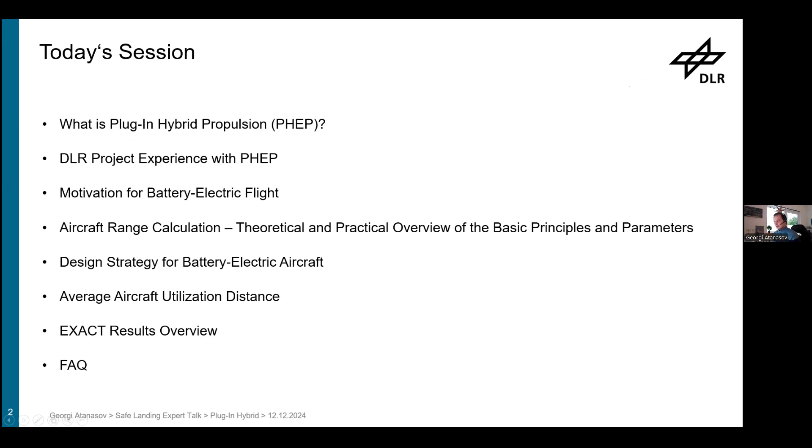I will be diving into some high level parameters on how we model aircraft, and then go into design strategy for battery electric aircraft and discuss what kind of aircraft utilization distance is used in global aviation, and what range is required for such aircraft to be viable.

And then go into the EXACT project result overview on the concept. As Finley mentioned, there will be some pauses in between the different sections so that we can discuss them separately and not mix the questions up—basically, topic by topic, discuss the presented content and then continue.

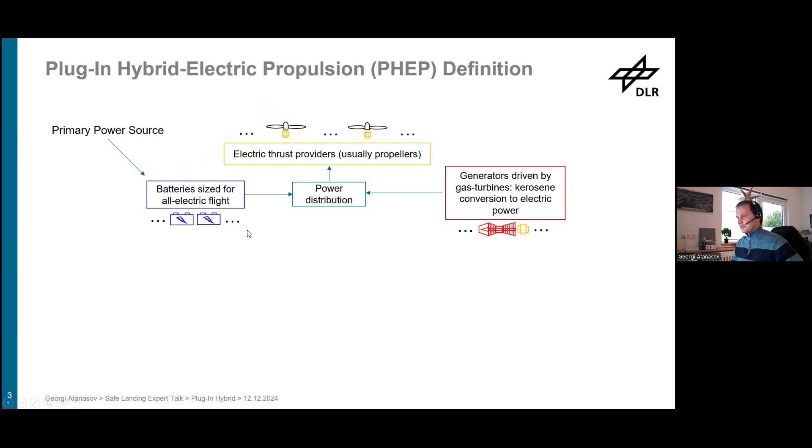Okay, so our overview on the plug-in hybrid electric propulsion. It is basically electric propellers or electric propulsors that are driving the aircraft, and they're powered primarily by batteries—battery electric flight. So the aircraft can do a completely electric mission and service completely electric routes. Range is usually up to 300 to 600 kilometers, depending on the battery technology. Everything is done electrically: taxi, takeoff, climb, cruise, descent, landing, and so on.

Secondary power source are range extenders, so generators driven by gas turbines serving as range extenders, and they serve mainly for operational flexibility. When additional range is required, with their help, such an aircraft can achieve even thousands of kilometers of range, which is practically impossible as of today's battery technology for only battery electric aircraft—maybe scratch the surface on 1,000 kilometers, but not too much. But with range extenders, operational flexibility is not a problem. These range extenders are also used for mission reserves.

So plug-in hybrid, like in cars—the term is from car technology. Plug-in hybrid cars refers to fully electric operation capability, and then range extender on when additional flexibility is required, so when you want to travel further than you usually travel.

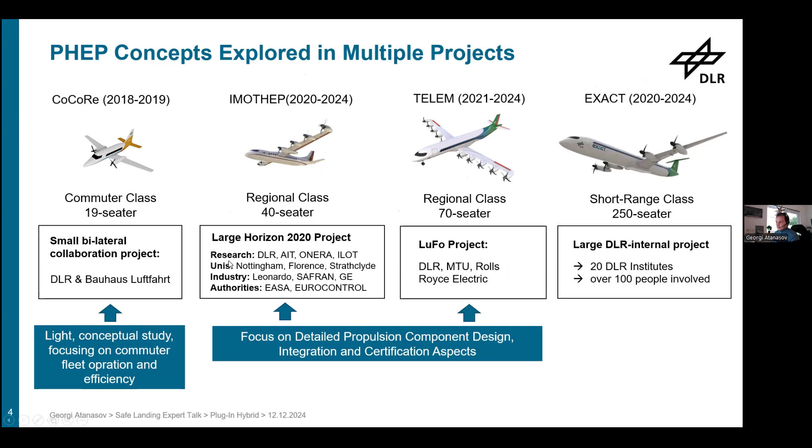Then 2 projects, so one large Horizon 2020 project, IMOTHEP, from 2020 to 2024. So this year it finished. It was a huge consortium with industry and universities and different research entities, like DLR, ONERA, AIT, ILOT, and so on. And we had also the authorities there, EASA and Eurocontrol, discussing certification aspects and operation aspects for such a concept.

Then there's also a TELEM LuFo project. It's basically a German funded project, and it was together with MTU and Rolls-Royce Electric, also focusing on the detailed propulsion component design, integration, and the certification aspect. Both of these had similar focus.

And then there is EXACT, which is a large DLR internal project with 20 DLR institutes involved and over 100 people active. EXACT 1, now EXACT 2, is even larger than this, but the results I'm presenting are on the EXACT 1 project. It focused on global fleet simulation, the operating cost assessment of different concepts, so not just the plug-in hybrid, but also other concepts, and comparison between the concepts in the same framework.

So I'll start with the motivation for using batteries as a primary power provider, or maybe just a thought on the project.

Concluding thought would be that before 2020, this was more of a concept with a lot of uncertainties, and during these many projects, a lot of effort went into the modeling of the aircraft and the project. A lot of uncertainties were already removed, so the concept is much more mature, and it seems to be a feasible one. So a lot of research is still needed, but it's not just a crazy idea that might work. It's something that needs more exploration.

So why use batteries as a primary power provider? If you're looking at plug-to-shaft efficiency, we have sustainable energy sources on one side, and we have the propulsor shaft energy on the other, which drives the aircraft basically, a propeller or a fan. It needs to be powered by these sources somehow. So what are the options?

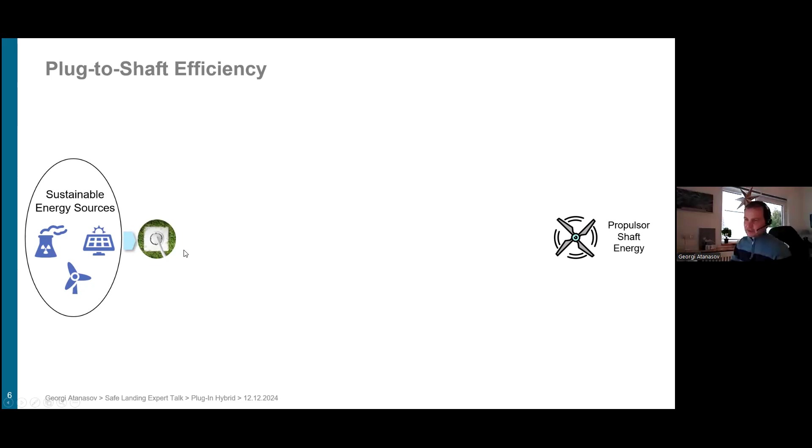These sources provide electricity, and this electricity can be used for different things, for example battery production, liquid hydrogen production, synthetic kerosene production. And if we take 1 kilowatt hour for each, we'll see what's left when we get to the propulsor shaft energy.

So first, on the synthetic kerosene production part, we have electrolysis, CO2 capturing, synthesis, logistics, and so on. So after the production process, what's left of this 1 kilowatt hour is maybe half that is fueled in the aircraft tank.

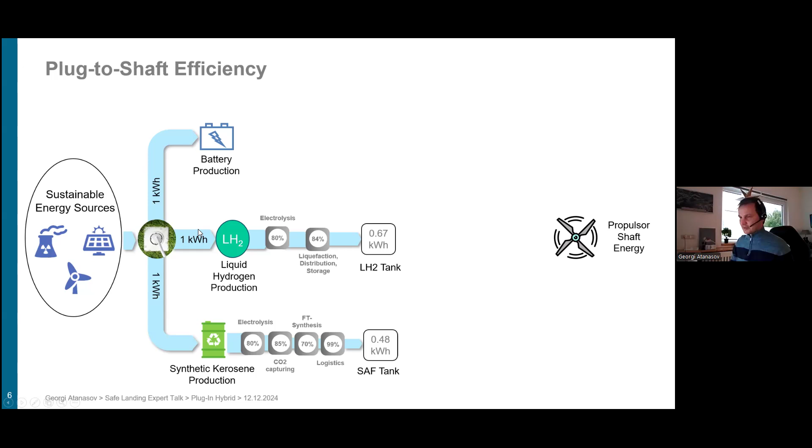Hydrogen looks a bit better because there's still only electrolysis and liquefaction, and then also distribution and storage. But overall, you get higher results, you're able to concentrate more of this output energy into the aircraft tank.

And then we have the batteries, which are quite efficient in terms of production, recycling, and charging. So what's left in the tank, or in the aircraft storage system, is most of what you've taken from the plug. And this is the plane with the energy stored in the vehicle.

So further, we need to convert this energy into useful power for the aircraft propulsion. If you take kerosene, usually you drive a gas turbine, and it has an efficiency between 30 and 55%, depending on the class, the maturity, and the entry into service level. What's left basically from this 1 kilowatt hour is less than a quarter of the energy that can be used for aircraft propulsion.

For hydrogen, it's a bit better. A gas turbine and fuel cells are two options, with fuel cells being more mature. For kerosene, you can also use fuel cells, but more high temperature ones that allow efficient reforming, though this technology needs a lot of maturing before it can be considered. For hydrogen, we can use fuel cells much more easily, and gas turbines are even a little more efficient than kerosene gas turbines, which has been explored in EXACT and other projects as well, or potentially more efficient - this needs to be consolidated.

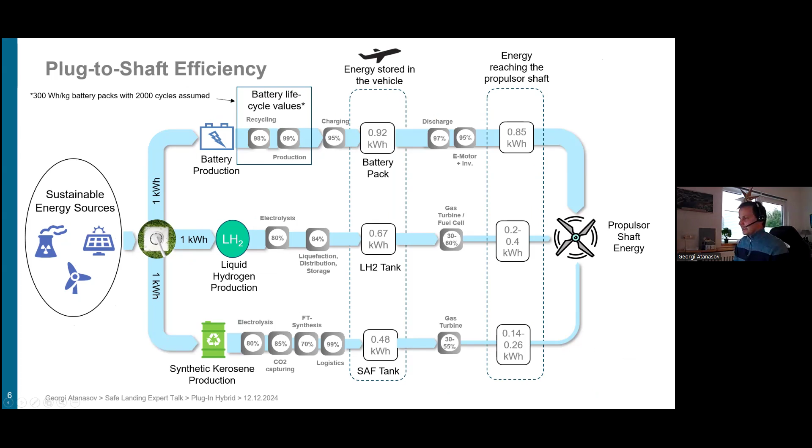The tendency is batteries are most efficient from sustainable sources to the propulsor shaft energy. And this is the main advantage.

This is why it's interesting to look into them, especially in the context of sustainability. When we look into the limitations, there is this one limitation that's basically been the showstopper up till even today for industry to pick up battery as energy storage option.

In fact, it's two orders of magnitude, or one to two orders of magnitude worse than chemical energy storage in terms of energy density. The main impact of this property is on the achievable range of battery-driven vehicles.

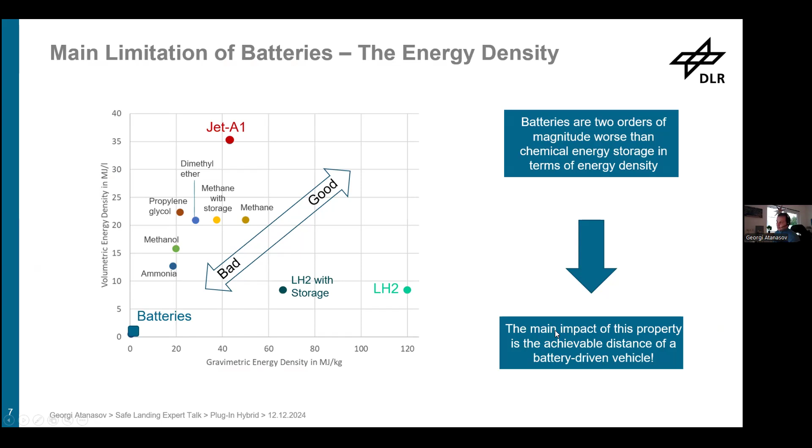So in order to elaborate on this, I will go into the theory of range calculation, the basic theory of range calculation for aircraft, just to explain how the aircraft design transitions from gas turbine based to battery based.

If we look into an aircraft with the forces acting in level flight, you have thrust, drag, lift, and weight. The aircraft wants to cover distance from A to B.

So in cruise, it will have lift equals weight and thrust equals drag. This is the most basic state, which is common for aircraft, because aircraft are mostly in cruise, or it is the longer range ones.

We have L over D, lift over drag, which can be used to derive the drag. This is a parameter describing aerodynamic efficiency of the aircraft. It's basically a characteristic of how well the aircraft is designed.

If you design an aircraft really well and fly it in its design point, then it will have a good L over D. If it's badly designed, or more designed for robustness rather than efficiency, then it will have a lower L over D. Higher L over D means less drag, lower means more drag.

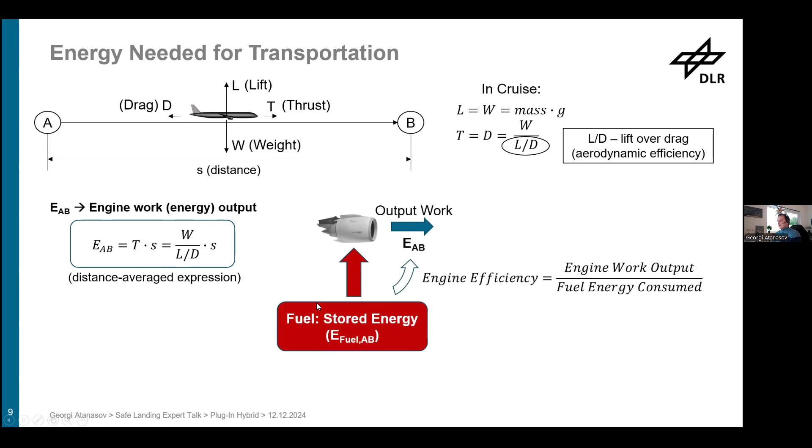So what is meant by the work done by the engines is the output work of the engine, but the engine is fed by some kind of fuel, stored energy, and there is some efficiency for the transition between this stored energy into output work. You take the fuel energy, burn it, and some of it converts into work, which drives the aircraft.

The engine efficiency is basically the engine work output divided by the fuel energy consumed. So if we take the engine work output, we can calculate the fuel energy that's needed from A to B, by the work that needs to be done by the engines divided by the engine efficiency. It's basically the stored energy that you require for moving the aircraft from A to B.

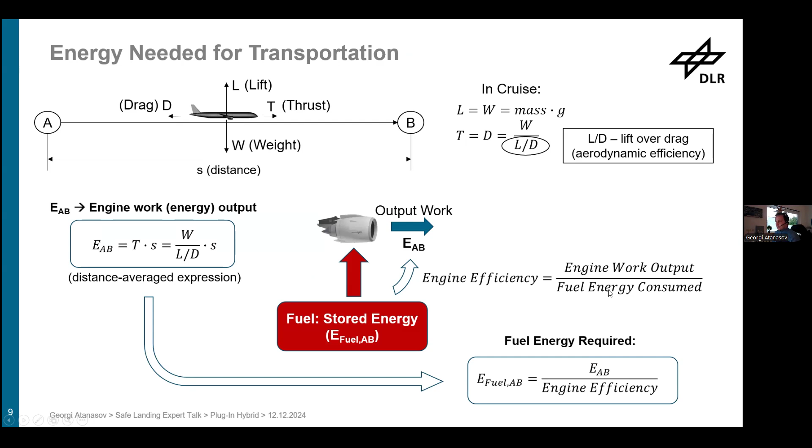I hope this is clear enough. We have this fuel equation, basically the same but with all the parameters included. So the fuel energy needed from A to B depends on the aircraft mass. A heavier aircraft will require proportionally more fuel energy.

Then we have L over D, the aerodynamic efficiency. A more aerodynamically efficient aircraft requires proportionally less energy. And more efficient engines reduce the energy proportionally as well. So all of these affect the fuel energy required proportionally.

This is, by the way, the base for the famous Breguet equation, which however additionally considers fuel burn. The mass of the aircraft is reduced when it burns fuel from A to B, so it starts heavier and ends lighter. This equation still needs some additional integration over the distance, and then you get the Breguet equation, but this is the base for it. These dependencies on the overall mass, the aerodynamic efficiency, and the engine efficiency are still the same.

So let's go into how aircraft mass can be estimated, rules of thumb. It can be divided into four parts.

Why aircraft mass? Because, as mentioned, these are the 3 main parameters. I'll go on each of them separately and the theory behind it and how they can be derived. Starting with the mass, we have the payload mass, which is mostly a requirement for an aircraft, so it needs to be able to carry this much payload.

Then we have the payload accommodation structure, which in case of airliners is a fuselage with the onboard systems. Statistics show that, at least in regional short-range aircraft, the fuselage is approximately as heavy as the payload. So if we have 10 tons of payload, the fuselage is also 10 tons, more or less, with a deviation of plus minus 10%, so this is quite accurate. Long-range aircraft are a bit heavier, so 1.1 or 1.2, but it's in the same order of magnitude.

If we look into the aircraft mission components, we have the wing, which needs to carry the aircraft. We have the engines, which make it take off and keep it in the air. We have stabilization surfaces and landing gears for the ground. All of these components depend on the total aircraft mass, so a heavier aircraft will need bigger engines, a bigger wing, bigger empennage, and landing gear, and so on. All of these together make up statistically 27.5% of the total aircraft mass, and this is true for all airliners.

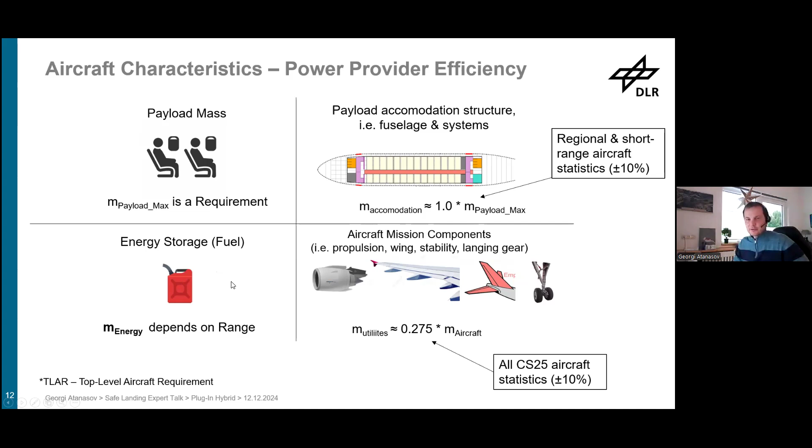It needs to carry a fuselage and carry some payload or passengers. So the remaining mass after fuel, wing, engines, landing gear, and so on is fuselage and payload, which are split more or less equally, as mentioned by statistical data.

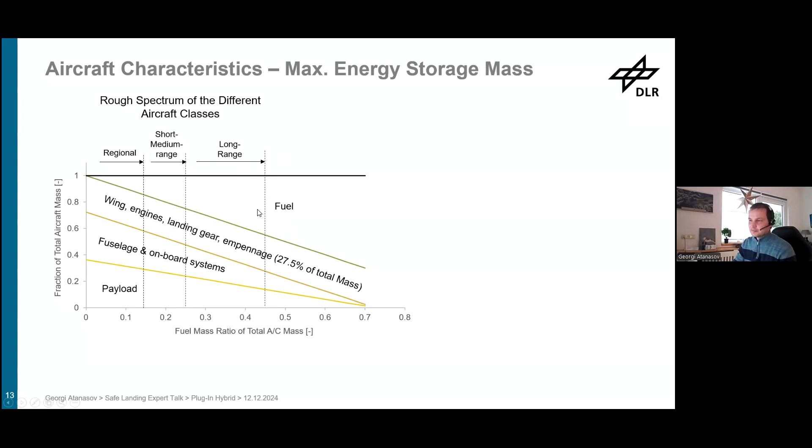40% means that, well, 50% means half of the aircraft is fuel, but long-range aircraft are mostly almost there, some of them. Because long-range aircraft have more fuel that needs to be carried, the total portion of the aircraft left for payload and fuselage is the least. So payload to total aircraft mass ratio, you can see that long-range aircraft have something like 15 to 20% of their total mass allocated for payload, and the remainder is fuel, fuselage, wing, engines, and so on.

The regional aircraft have about 1/3 of their mass allocated for payload. So regional aircraft can carry at most 1/3 of its mass as payload, while long-range aircraft carry 1/5 or 1/6 of its mass as payload.

So, this is a summary of what I just said. Let's get into an example.

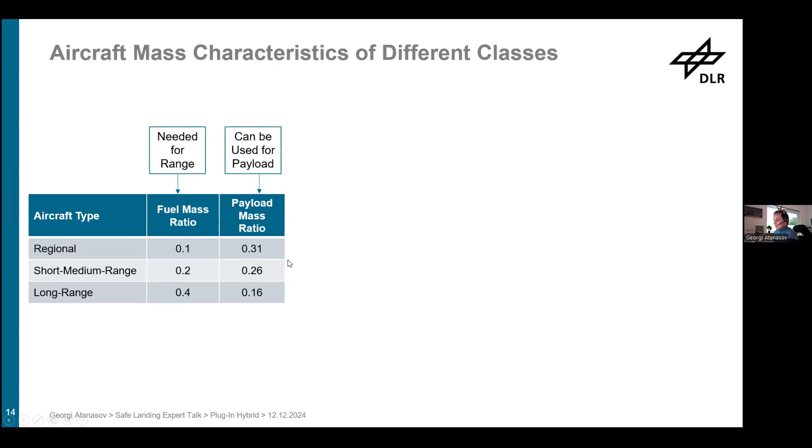Here in this table, you can see the regional, short-medium range, and long range classes, their average fuel mass ratios, and the payload mass ratio that is left according to the statistics. So one example: if you want to design an aircraft with 100 tons of total mass, explore the mass breakdown of the different aircraft classes. If fuel mass ratio is 0.1, that means 10 tons of these 100 tons are fuel. For short medium range, 20 tons are fuel, and for long range, 40 tons are fuel.

Wing, engines, landing gear, and empennage are 28%, 27.5%, so about 28 tons of 100 tons in all of these cases. So more or less for each class of aircraft you get similar relationships. Whether the aircraft flies a short range or a long range, the engines, wing and so on will remain more or less similar. Of course it won't be exactly the same, but the tendencies are important here.

What's left for each class is the fuselage and payload. The regional aircraft used up just 10 tons of these 100 tons on fuel, and a lot is left for fuselage and payload carrying. So a regional aircraft will be able to carry the most payload. A short range aircraft will carry less payload. And if you want a 100 ton aircraft that serves long range routes, it will only be able to carry 16 tons. So you need to design one with a small fuselage and fewer passengers, because otherwise you cannot serve long range routes—you need a lot of fuel there.

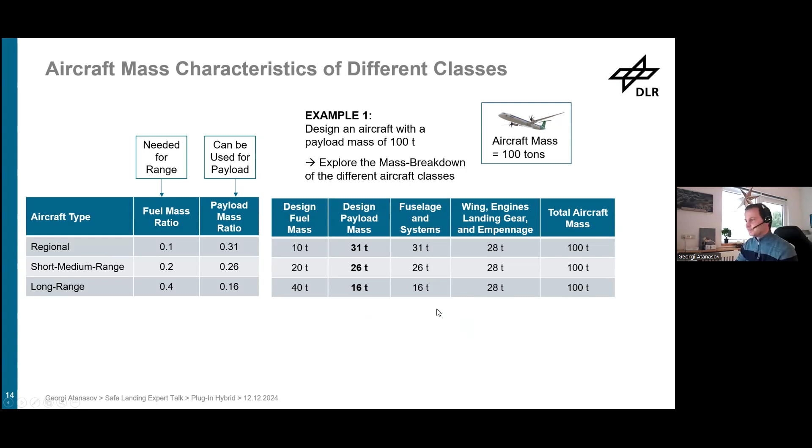So this is the key point here. Example 2: now imagine having 10 tons of payload fixed. This is the requirement, not the total aircraft mass. You need to transport 10 tons of payload for different classes—one example for regional, one for short medium, and one for long range. So what happens with the mass of the aircraft?

So design payload is fixed, which means fuselage and systems are mostly fixed. It won't be exactly true for the long range fuselage—it will be a bit heavier, but still the same order of magnitude. If we fix these and know the other two, the wing, landing gear, and empennage and design fuel depend on the total aircraft mass.

When we apply these relationships, we get a 32 ton aircraft for the regional class. So a 32 ton aircraft will be able to carry 10 tons on a regional route. A short medium range aircraft will be 38 tons, so it will be heavier—wing, engines and so on will be heavier, and it needs more fuel.

But what's surprising is that it's not proportional, it's disproportional—it increases quite fast and approaches infinity when the fuel mass ratio gets too heavy.

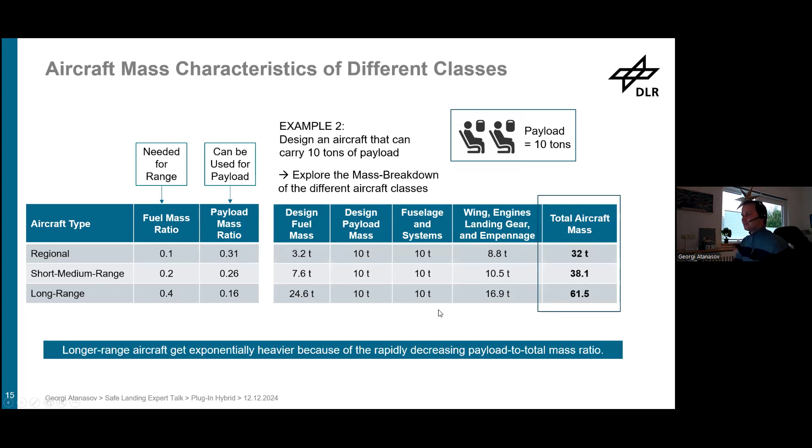A long range aircraft is more than about 2 times heavier than a regional aircraft. This is the surprising effect of designing aircraft for longer ranges—you need a lot more mass for such an aircraft to carry the same payload.

Then we have the efficiency of the aircraft, the second parameter. I showed the work output of the engine and the stored energy, the relationship between the two—how much of the stored energy can be used for useful work is what describes the engine efficiency. Engine efficiency depends on the engine technology, basically how much of it the technology is able to convert into useful output.

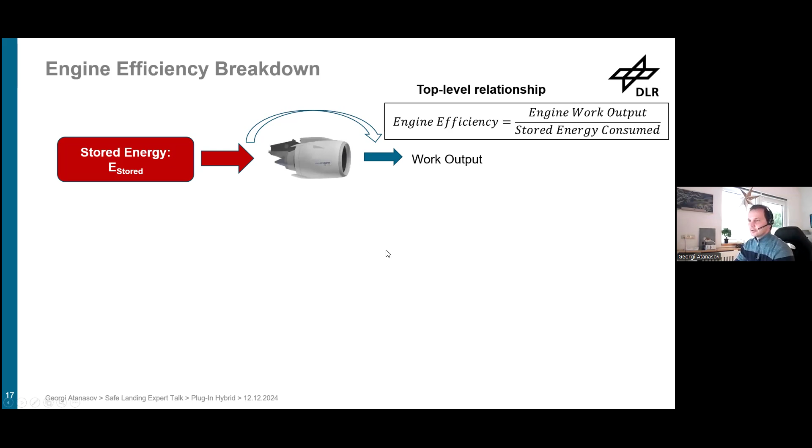But we can break it down further. An engine usually consists of a power provider and a thrust provider. The power provider is typically, in a turbofan case, a gas turbine, which takes the fuel and converts it into power output. This power output is then transferred to the ducted fan, which creates thrust, which is then converted into work by moving the aircraft. So there are two conversions actually. Engine efficiency is one parameter, but it can be split into two: engine efficiency equals power provider efficiency times thrust provider efficiency.

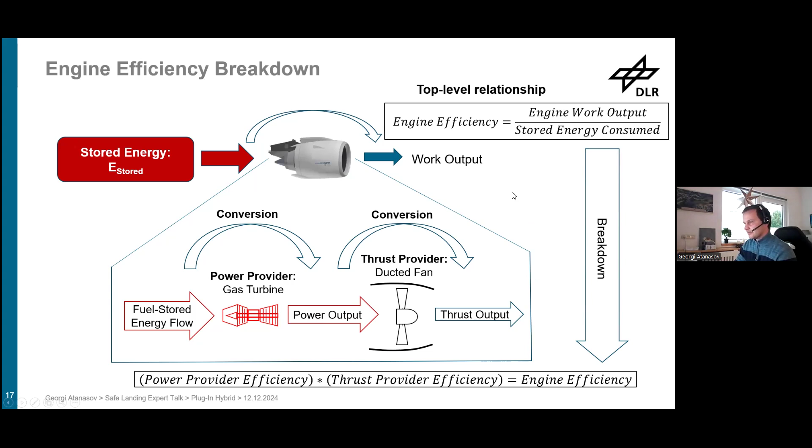This can be used as a breakdown to describe, especially when you change power providers, like from a gas turbine to a battery or to a fuel cell. This split helps to describe what happens. So there's some examples on different power providers and thrust providers.

A turbofan will be a gas turbine driving a ducted fan. A turboprop would be a gas turbine driving an open propeller. Fuel cell powered electric propeller basically means a fuel cell and electric motor driving a propeller.

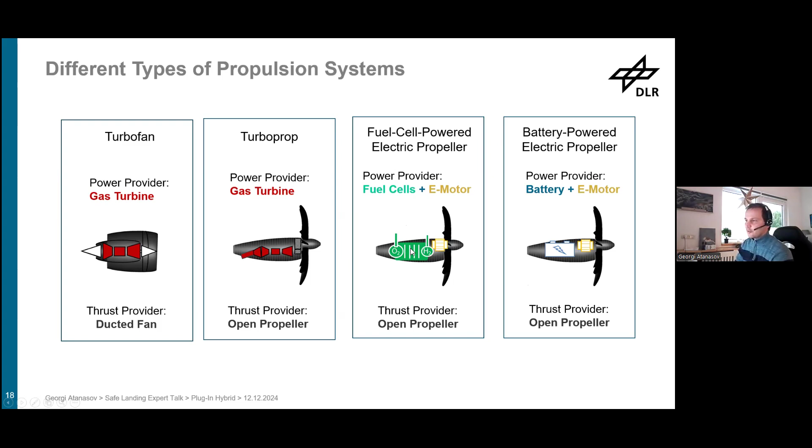The fuel cell converts hydrogen and takes air from the ambient air to create electricity, which drives the electric motor and then drives the propeller. And then we have a battery, which drives the electric motor, which drives the propeller. So these are examples of how power provider and thrust provider can be split.

If you look into the power provider side, power provider efficiency, we have the gas turbines and 2040 technology Pareto front here. This is what we used in EXACT as a Pareto front to calculate the aircraft performance. We had basically different classes of the gas turbines, and larger gas turbines are more efficient than smaller gas turbines.

You can see approximately what these classes mean. So 20-25 megawatt class drives turbofans, 10 to 20 megawatt class would drive a large twin turboprop, so the same class as the turbofan. And the regional aircraft are under 5 megawatt class, basically.

And yeah, fuel cell propulsion power providers are quite efficient, but mostly on the smaller classes. So we still have not much experience on what happens here, but you can see already that this high advantage is mostly in this class, in the small aircraft, because the gas turbines are getting...

Not very good in the smaller megawatt classes. So they're quite good actually in the larger classes where the usual transonic aircraft fly. So they are comparable actually to a fuel cell efficiency. So fuel cells do not have a lot of advantage here, but have a lot of advantage here.

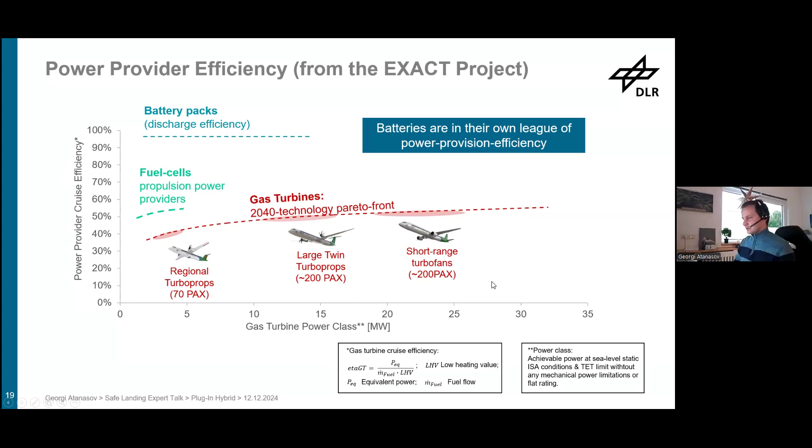And we have the battery pack discharge efficiency plotted here, and you can see it's basically in a class of its own when it comes to conversion of power, which I already mentioned. Some explanations on the axes that I've used, but this is mostly for after the presentation if you want to take this to look in the slides.

So we have then the thrust providers, and I've plotted the two most common. There are others as well, like for example counter-rotating propellers or propellers with a stator and so on. But for this presentation, it's sufficient to just show comparison propellers and ducted fans.

Below is the Mach number of the aircraft, so the speed. 1 means the speed of sound, and after that it's supersonic aircraft, so Concorde, for example. But here it's around 0.8 where the usual transonic turbofans fly, so most of today's airliners, and they use turbofans.

So the thrust provider can be called a ducted fan, and the efficiency is around 70 to 75%, depending on the bypass ratio and how refined the technology is. And then we have also propellers as an alternative, so for turboprops are generally much more efficient as a thrust provider.

But then again, we have the not very efficient power provider, so that's kind of a balance there. But turboprops can get to efficiencies of around 90% as a thrust provider.

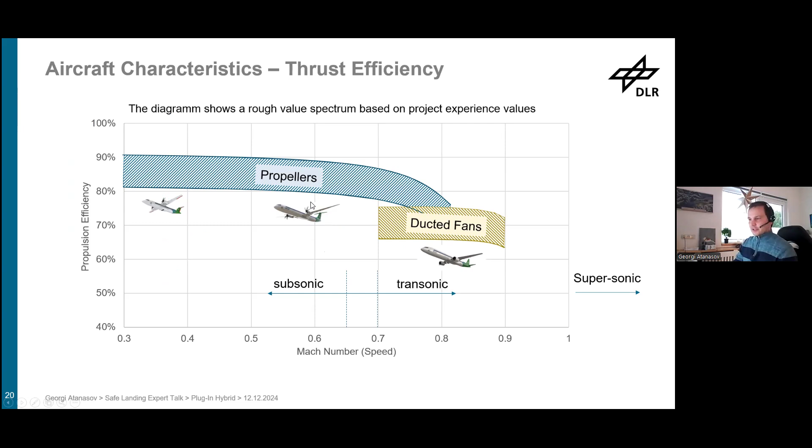L over D, so aerodynamic efficiency, is the third parameter. How to describe the L over D again is lift to drag ratio, how much lift the wing generates versus how much drag the whole airframe and the lift generate. So higher L over D means more efficient aircraft, and less thrust is needed for an aircraft with a higher L over D.

And a gliding aircraft is a good example that I find quite easy to understand as a concept. So a gliding aircraft, for example a paper airplane, so a small airplane that you just throw - a glider with an L over D of 10 will move 10 meters forward when dropped from 1 meter height.

So this is how it can, in my opinion, be best described. If you throw a paper airplane with an L over D of 10, it will move 10 meters for each meter that it drops. This is what L over D means.

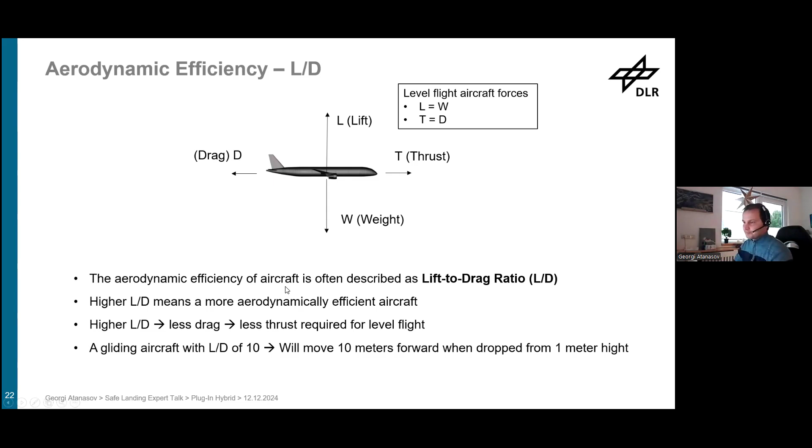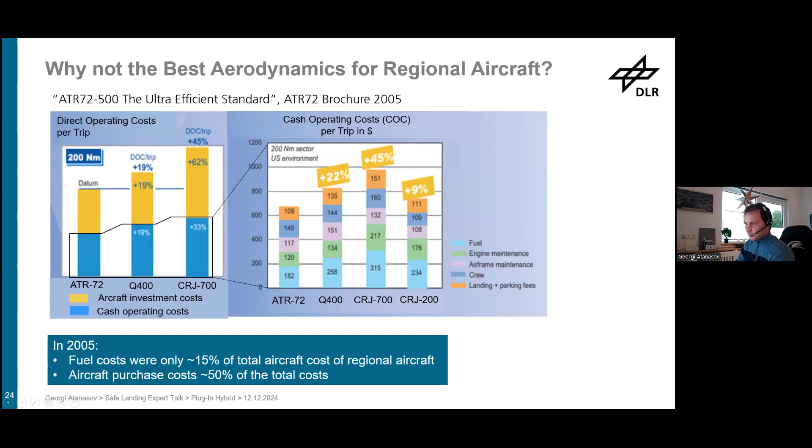Just an information on why we don't see this efficient aircraft.

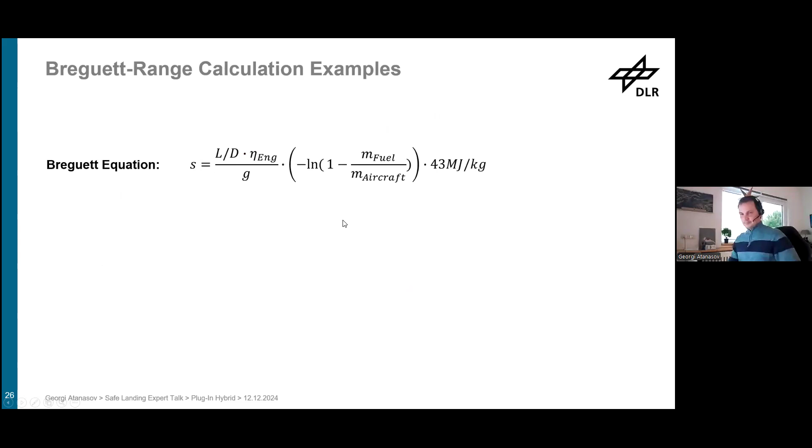Just the examples on the Breguet range. If we take the Breguet equation, now we see the logarithm of the range here. I just rearranged it a bit, but this is the Breguet equation essentially. We have the energy density of kerosene, the aerodynamic efficiency of the aircraft, the engine efficiency of the power provider, of the whole engine, not just the power provider, so the whole engine efficiency combined, and the fuel mass fraction. So this is how much of the aircraft mass is fuel mass. And this is the range dependency on these parameters.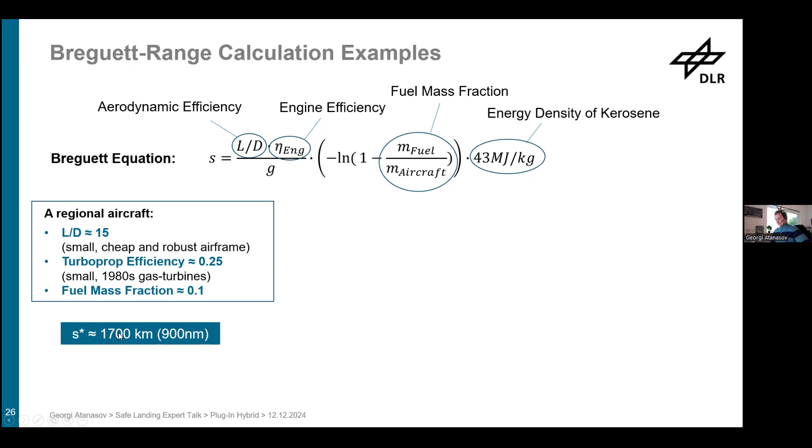If we calculate a regional aircraft with an L over D of 15, so small, cheap, and robust airframe, we'll have a turboprop efficiency of 25%, so small jet engines, gas turbines, which drive propellers, will be about this efficient. And then we have the fuel mass fraction of 10% that I showed. Then the expected range will be about 900 nautical miles, or 1,700 kilometers.

If we do the same with short range, so L over D 17, so higher, turbofan efficiency is higher, and the fuel mass fraction is also higher, so the range gets a lot more, which is also typical for short range aircraft, about 3,000 nautical miles.

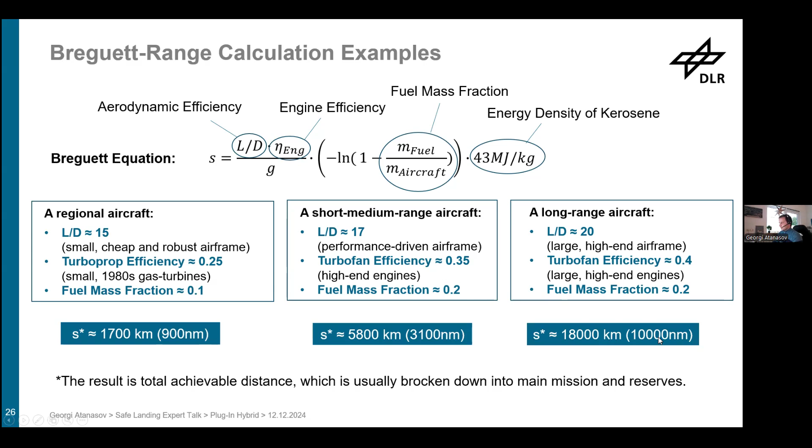And then if we go into the long range aircraft, then you can see higher L over D, like I showed in the diagram, higher engine efficiency, and fuel mass fraction. I forgot here, it should be 0.4. I'll correct the slides after when I distribute them. But yeah, it should be 0.4. And you get about 10,000 nautical miles range with this kind of parameters.

Important clarification at this point: is this how DLR Institute of System Architectures in Aeronautics calculate aircraft characteristics? The answer is no. We use complex multidisciplinary workflows with physically based models to calculate key aircraft characteristics like mass breakdown, aerodynamics, engine maps, and different operating points, conditions, and ratings, and different aircraft configurations. So it's really complex.

It is not easy to model an aircraft, and we use also reference aircraft data for calibration of the models. We use interfaces, or define interfaces, for feeding back higher fidelity models with disciplinary experts in the different projects. And we optimize our models for defined parameters like operational cost, or efficiency, and so on.

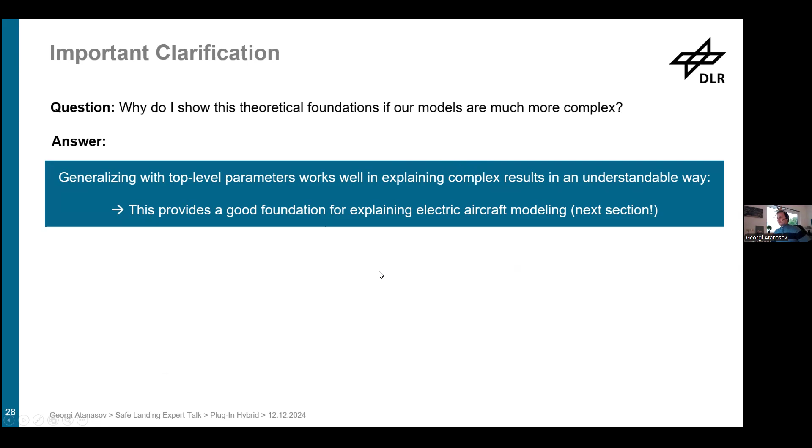So the second question is, why do I show these theoretical foundations if our models are much more complex? Well, generalizing with top-level parameters works well in explaining complex results in an understandable way. This is why I'm showing these. And it's important to understand which parameters drive what. This also provides a good foundation for explaining electric aircraft modeling, which is the next section of the presentation.

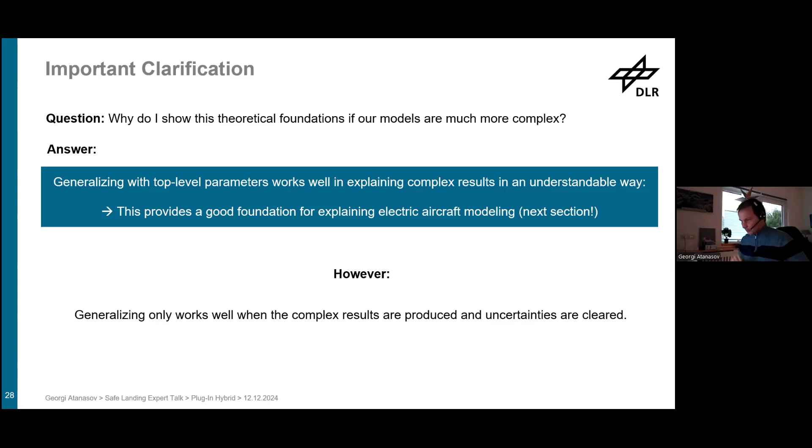However, it also needs to be mentioned that generalizing only works well when the complex results are already produced and the uncertainties are cleared. It's because we have good knowledge on the data that I showed before that it can be generalized like this. But otherwise, one should really try to look more into detail when assessing new concepts and not use simple relationships.

However, these tendencies that I'll show in the next section are not shown with these models, but they are a result of the experience that we had on the projects, on the concepts that we've calculated in the different projects. So it's just for your better understanding.

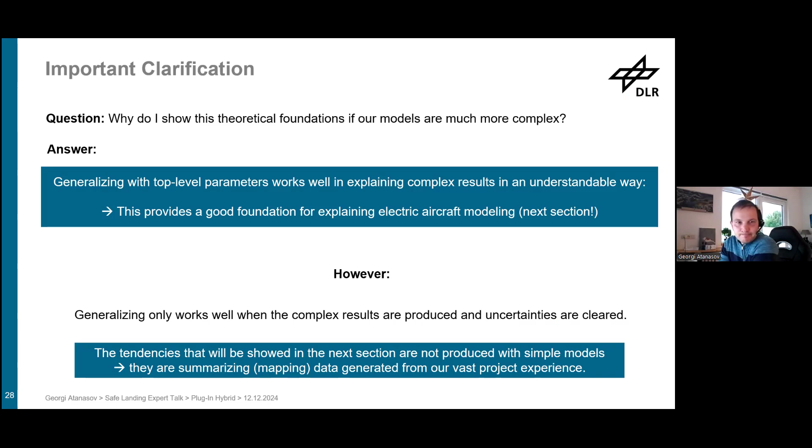Okay, so the next section will be how to design a feasible battery-driven aircraft. I'll try to be a bit more quick on this section, because then we have also some of the exact results. So half an hour, we'll see.

Then I showed the Breguet equation for kerosene-fueled aircraft range, and this Breguet equation is necessary because the aircraft becomes lighter during flight, so you need the integration over the distance. But for batteries, it's actually simpler, because battery flight doesn't burn fuel and the aircraft mass stays the same. So the integration is not necessary. All the parameters remain constant, and you can simply multiply those. And instead of energy density of kerosene, we have the energy density of batteries. So it's basically the same equation, but instead of the logarithm, you have just the battery mass fraction.

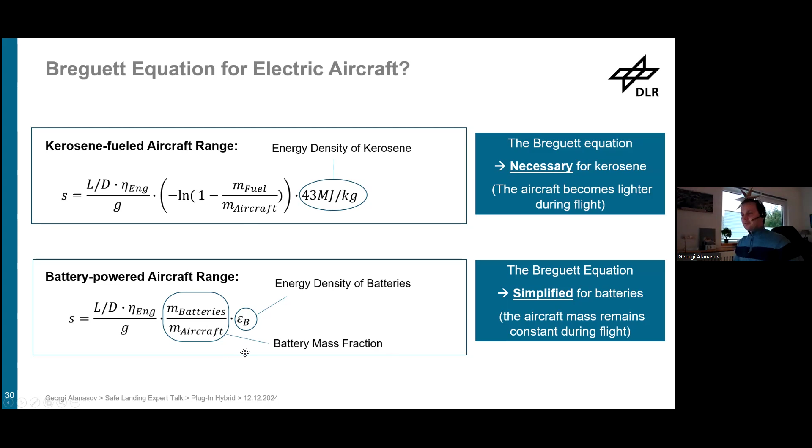So let's take a look at a retrofit solution. This is something that studies before have looked at a lot, like in 2015 or even before, asking: is a battery feasible for aircraft?

So a lot of studies were on let's retrofit an aircraft. What happens? I want to check here as well using this basic relationship. What happens if you retrofit an aircraft, a regional one? The reference, I'll use the regional parameters shown before: L over D 15, fuel mass fraction of 0.1.

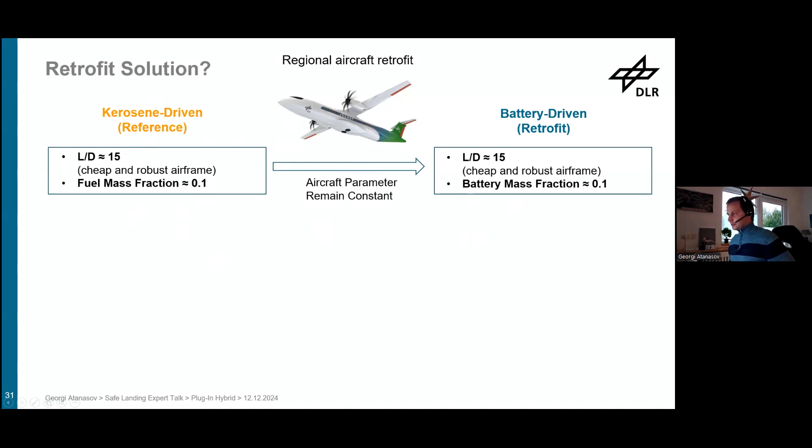So they remain the same for the retrofit, just the same battery instead of fuel mass fraction. This is the simplest approach. Then we'll have also turboprop efficiency 25% and energy density of kerosene. They change - battery and propeller efficiency are much higher, as already discussed, so 75% for total engine efficiency, and we have the energy density of batteries.

This is really bad. Especially in 2015 studies, which showed this - these initial studies, where people started looking into batteries as an option because the cars were successful. So if we took the battery density of cars, it's 80 times worse than kerosene.

So the range of this one is 1,700 kilometers. And if you retrofit it with this kind of battery and don't change anything about the aircraft, well, you get 65 kilometers of range. So that's kind of why you don't want to retrofit an aircraft with batteries. It's not practically possible for regional or commuter aircraft, or for any aircraft for that matter - you always end up with just too low ranges.

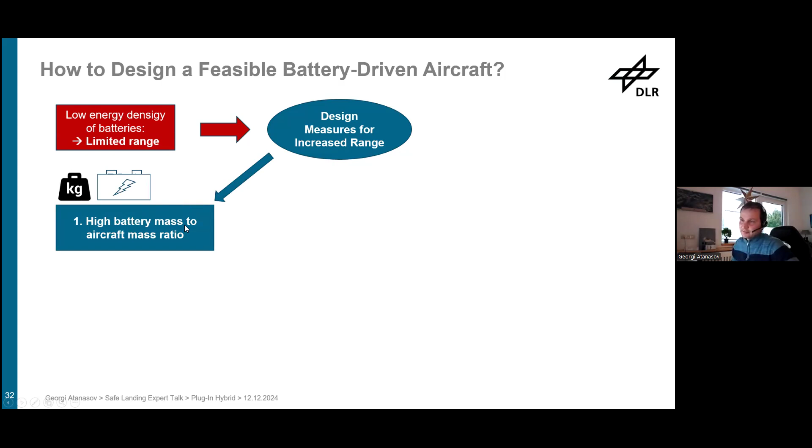So what will be design measures for this limited range? How can you increase the range? One option is increase battery mass to aircraft mass ratio. Another option is increase aeropropulsive efficiency and have lighter components on board. Some enablers are better aerodynamics, so higher aspect ratio wings and cleaner airframe design. This increases airframe cost, of course, but now we have different optimization parameters.

Slower flight speed, so match cruise speed with the best aerodynamic performance, which makes quite an impact most of the time because current aircraft tend to want to fly faster because of cost. This is mostly true for regional aircraft. For larger transonic aircraft, they fly at the optimum, but battery designs should also avoid transonic designs because they are more difficult to get more efficient, especially on the propulsor side and the aerodynamics, which are limited by transonic effects close to the speed of sound.

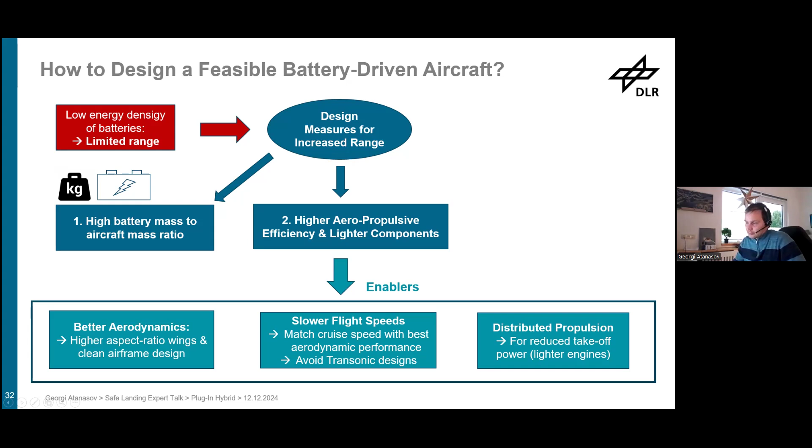Distributed propulsion is also one technobrick, which I won't go into detail on, but it helps with decreasing the takeoff power, so we have lighter engines. And then we have the range extender for hybridization - one measure to increase the range and flexibility is to have a range extender on board.

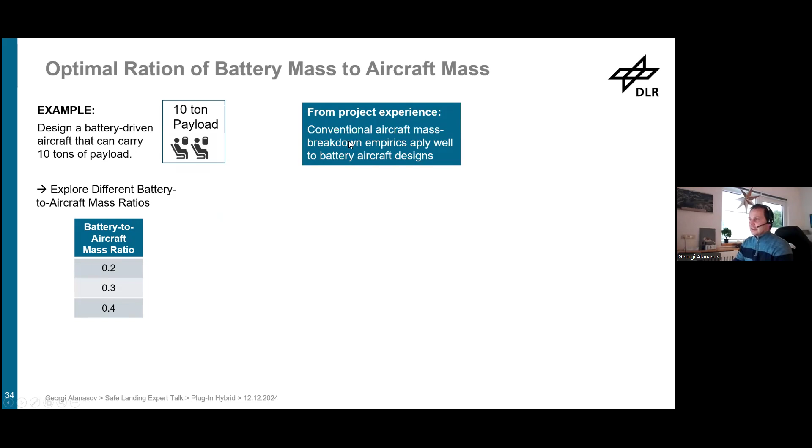So let's go first on the optimal battery mass to aircraft mass ratio. The example from before, you have 10 tons of fixed payload. Now we want to explore different battery to mass ratios - what happens to the aircraft mass with those? Well, it's basically the same thing as with the long range and short range aircraft. And if you use the same empirical estimation, we'll get: higher battery mass ratio means heavier aircraft. It's basically the same as for kerosene aircraft.

This increases electric range. This increases the energy consumption of the electric aircraft because the heavier the aircraft, the more electric energy is needed to move it forward. So it also increases costs because of the heavier airframe and engines and everything. So there needs to be a compromise between the two - you cannot infinitely increase the range. And project experience shows that battery mass fractions between 25 and 30% are usually a good compromise.

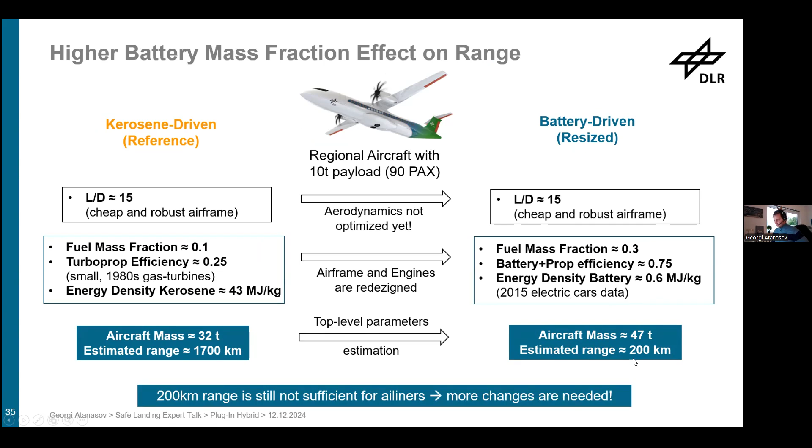And yeah, if we use this and resize the aircraft - now not just retrofit, but really resize the whole engines and wing and everything for a higher total mass and more battery mass fraction - if we first don't change the aerodynamics, assume still 15 L/D, fuel mass fraction changes. Now we have 30% instead of 10. Turboprop efficiency changes to 75% because of the battery propulsion, battery plus propeller efficiency 75%, and we have the same energy density of battery as before, which is the electric cars data from 2015. And then what happens is the aircraft gets heavier, 47 tons, so significantly more heavy, but the range is now not 70 or 65 kilometers, but 200, which is still not sufficient for airliners, so we need more changes.

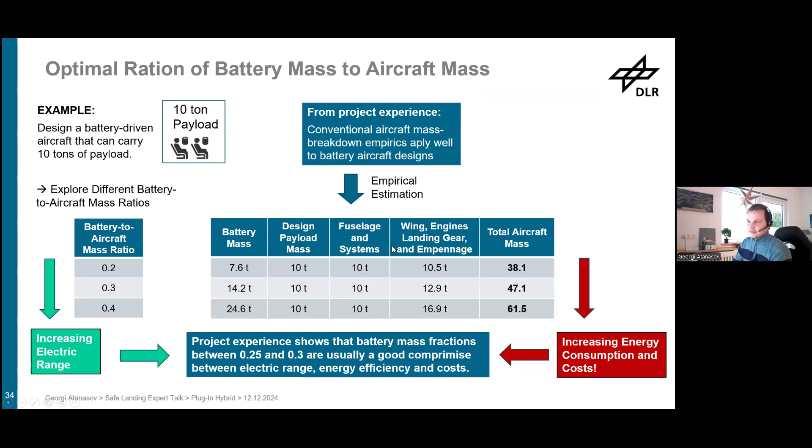Propulsive efficiency can be higher and L/D can be a bit higher if you design the aircraft accordingly to what the battery propulsion needs and optimize it for it. So what does design from scratch actually amount to?

First, the retrofit with 65 kilometers battery mass fraction. Then we changed the battery mass fraction to 30%, got 200 kilometers. Now we have a new design with L/D of 21 and battery plus propeller efficiency of 80%, and we get 300 kilometers. So design from scratch can shift the range of a retrofit by a factor of 5, which really needs to not be underestimated.

So retrofitting for a completely new technology is not a good idea. New design is always needed for any radically new technology. And this is what's possible, basically with 2015 car technology level.

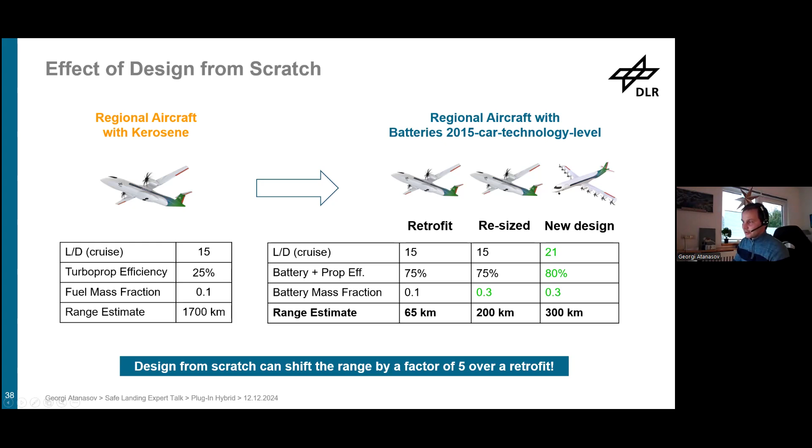What is the effect of battery technology improvement? Well, before we had from cars 160 watt hours per kilogram energy density, to 200 maybe on some occasions. Studies in 2015 to 2020 assumed mostly these efficiencies. And currently, TRL 6 technologies, mostly from China, are basically showing 300 watt hours per kilogram on pack level.

And next generation roadmaps expect 500 watt hours per kilogram on pack level. And there are a lot of Chinese products at TRL 6 and up also showing this. So this is quite amazing how fast it developed.

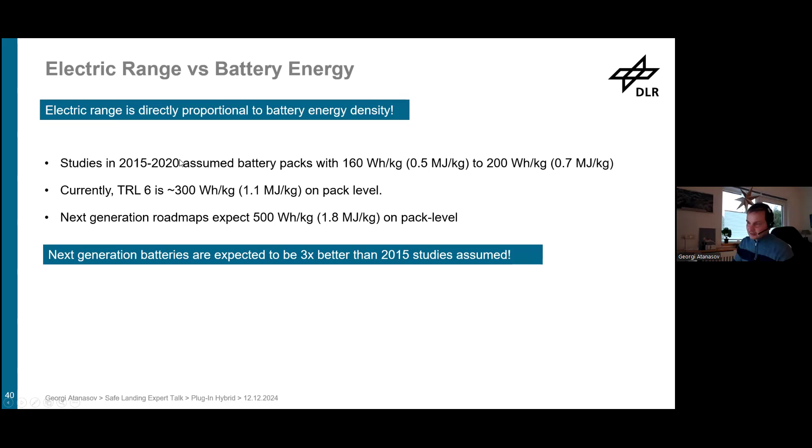So batteries of next generation are basically expected to be 3 times better than they were in 2015 studies. So what happens to a newly designed aircraft for 2040 batteries is you get not 300 but 900 kilometers of range, which is already starting to sound not bad. So not exactly what you need, but it's already in the domain of what you could use in aviation.

And then important notice: this is not the effective, not the practical range. This is the total range of the aircraft. So practical range is something else. Now we go into these details.

If I say electric flight distance estimated with a simple equation is 900 kilometers with a battery mass fraction of 30%, this means that this distance is the whole flight of the aircraft. And usually airliners have to have a main mission and a reserves mission. This is important. Reserves mission needs to be about 100 nautical miles diversion and then loiter for 30 minutes.

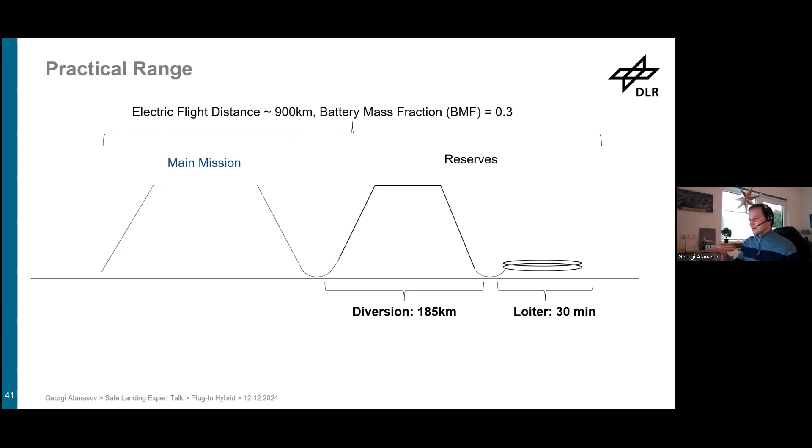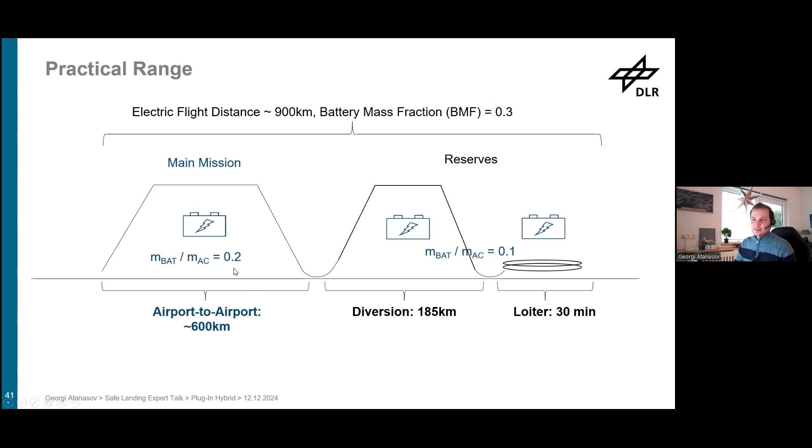Which eats about 200 to 300 kilometers away from the battery. So basically 10% of the battery mass is only for reserves, and only 2/3 of the battery can be used for the main mission. So effective range drops significantly when you apply the reserves and other factors. I've not shown everything, but this is the main effect.

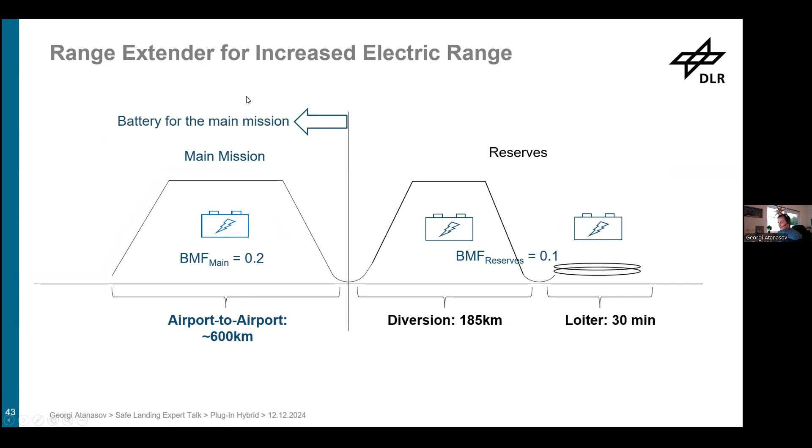So why plug-in hybrid? This was the third option to increase range. And what's amazing is that you can increase the main mission range when you build a plug-in hybrid. Because part of the battery is used for main mission and another part for reserves, if you split these two and use the battery for the main mission and use kerosene for reserves...

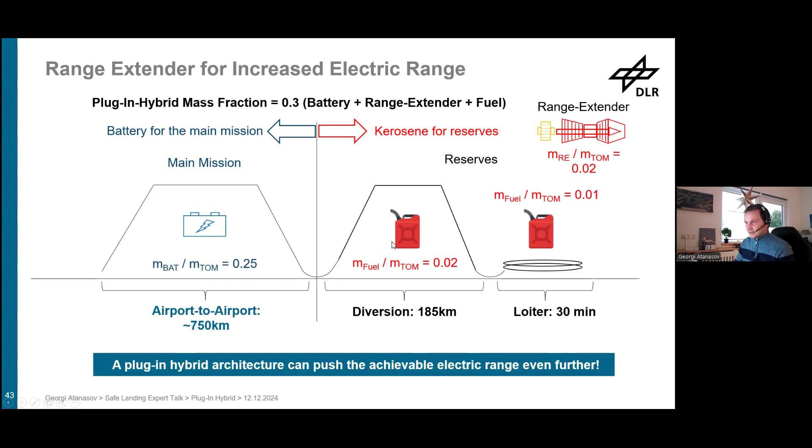assume the same total mass fraction for the plug-in hybrid of 0.3, so battery plus range extender plus fuel. So fuel mass and range extender mass are about 5% of the total aircraft mass, and 25% remain for the battery. And this shifts the range from 600 to 750 kilometers, which is already quite a good improvement. So that's why plug-in hybrid propulsion is really synergetic with aircraft requirements and needs.

So additional benefits of a plug-in hybrid: we have the range flexibility. With this, you can have thousands of kilometers available for use. It won't be really efficient there, but it will be able to fly them. And sometimes you need the flexibility to do it.

So the range flexibility can also allow a lighter battery. You don't need to optimize for more range now because you can cover a lot of the market with this hybridization. So shorter hybrid missions - for example, if your electric mission can fly 750 kilometers electrically, and you decide to fly 1,000 kilometers in hybrid mode, then just a quarter of the mission will be with the gas turbine.

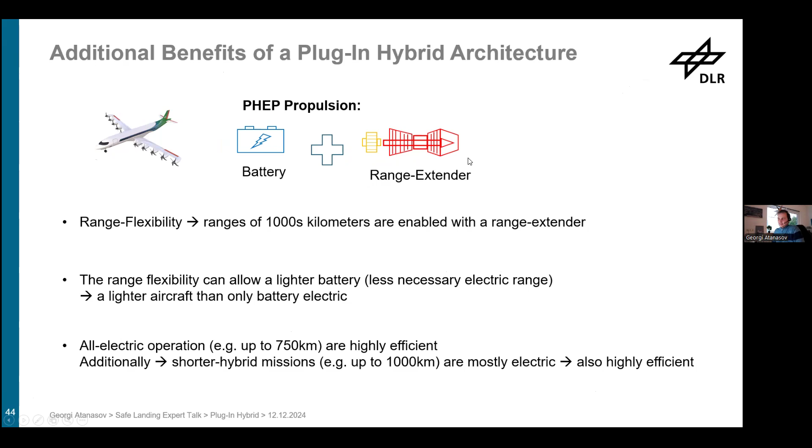And so the whole 1,000-kilometer mission is basically electric - 75% of it's electric, so also quite efficient. This is the reason why, if you have a range extender, you can potentially design for a smaller battery, making the whole aircraft lighter and more cost efficient.

Okay, so I think I'll go on first for the range requirements. What ranges are required for plug-in hybrid aircraft to make a difference globally?

I like this diagram. This is the trip distance in kilometers spectrum for 19-seater, commuter aircraft class, the really small ones. Data from 2018 shows how they're utilized. Most missions are under 200 kilometers, and 90% of missions are under 400 kilometers. So this class would be perfect for electrifying, right?

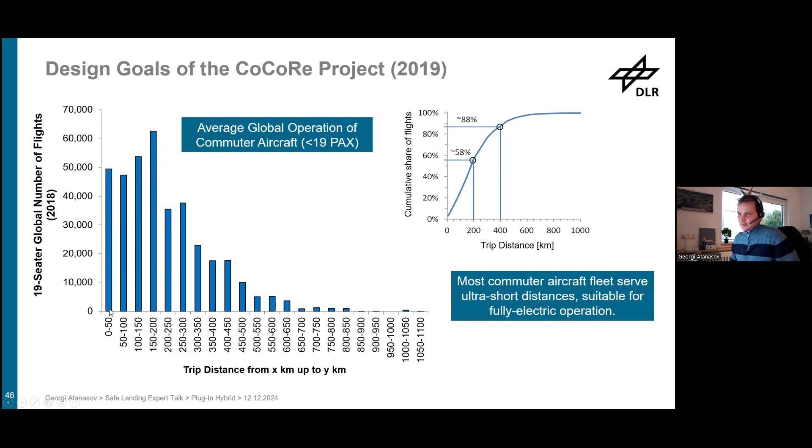With plug-in hybrid, you can use this small amount of missions in hybrid mode, and still service the whole market with this aircraft, while most of your operation will be electric, which is great—you can reduce a lot of emissions.

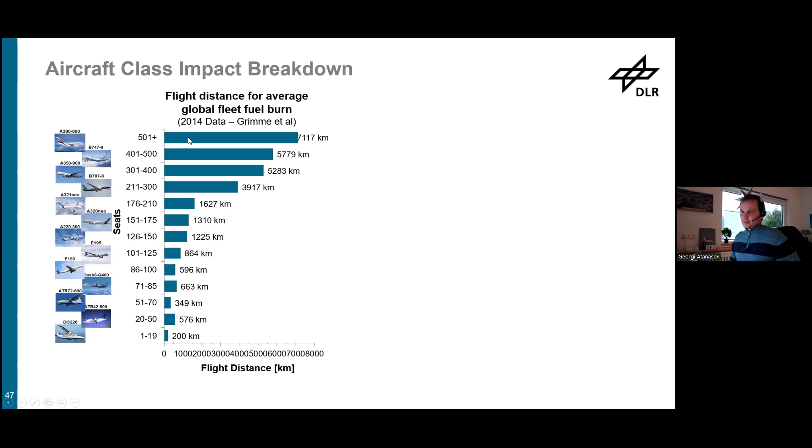The problem is this plot of global aviation from 2014, showing the average distances served by different aircraft classes. You can see small aircraft tend to serve the smallest routes, like island hopping. Then the average range gradually increases, and the largest aircraft serve the longest routes.

What was the global fuel burn in 2014? If you split it into classes, aircraft under 100 seats get 9% of the whole global fuel burned, and commuter aircraft get 0 point something. So commuter aircraft are not exactly relevant for the climate impact of global aviation, at least for replacing existing ones.

The most relevance is on the larger aircraft, those with 100 plus seats, and they fly a bit longer on average than typical regional aircraft.

So if a technology is to be pursued as a game changer in aviation, it needs to cover this range. As I've shown, 900 kilometers of battery range—even the theoretical one without reserves—is not enough for this sector.

The average missions are longer, and that's why you need the plug-in hybrid, because you can serve such missions efficiently by hybridizing part of the energy.

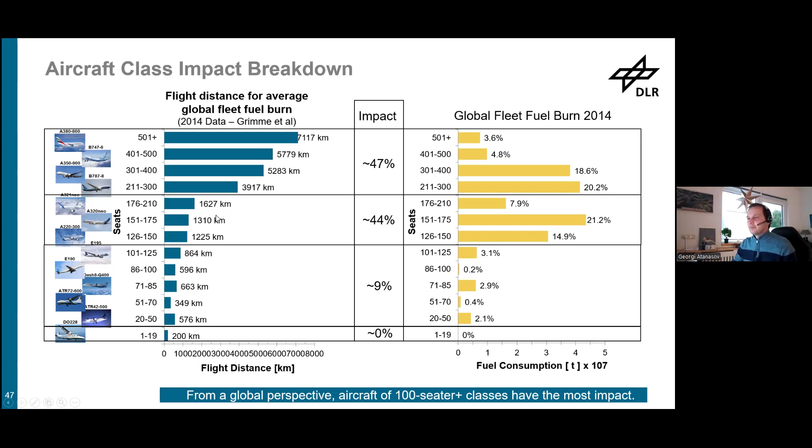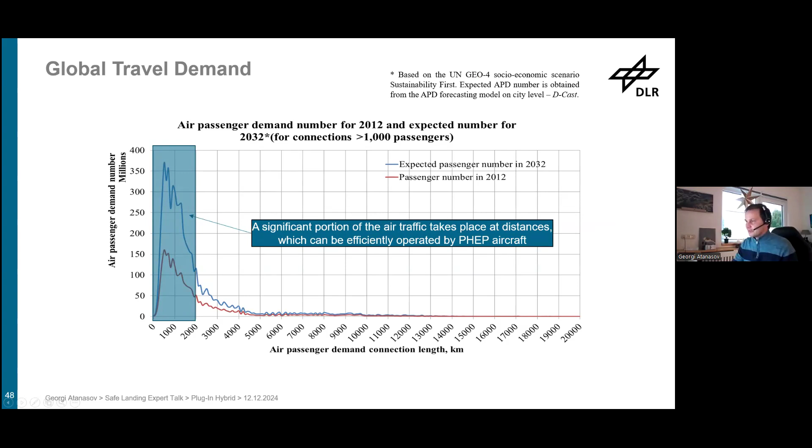Okay, now we get to exact—maybe a short break, and I'll try to browse through the main conclusions.

I think you're probably good to keep going, just want to make sure you get it all done. There were questions discussing carbon pricing, and one question sparked a bit of conversation around why distributed propulsion versus just having two propellers, if you're able.

That's a good question, but it's another hour of presentation to understand what happens there. In this case we have experience modeling distributed propulsion versus two propellers, and you're able to reduce takeoff power and the whole mass of the aircraft by distributing, because you're more redundant in case of failure. This is the basic effect, but there are other effects that pile up and make it more efficient. We'll leave that to a different presentation, so you can continue.

Okay, so about the exact project, as I mentioned, it was concentrated on the global impact assessment of different aircraft concepts. The goal was to look for the most appropriate aircraft technology, propulsion technology, and overall technology that can drive sustainability forward in terms of global impact.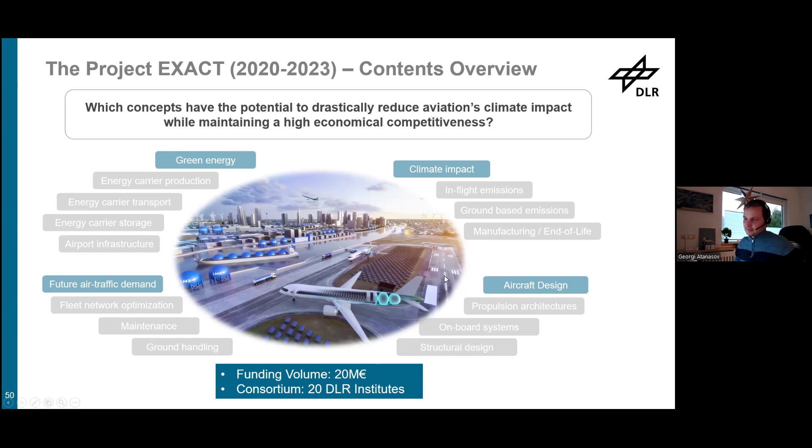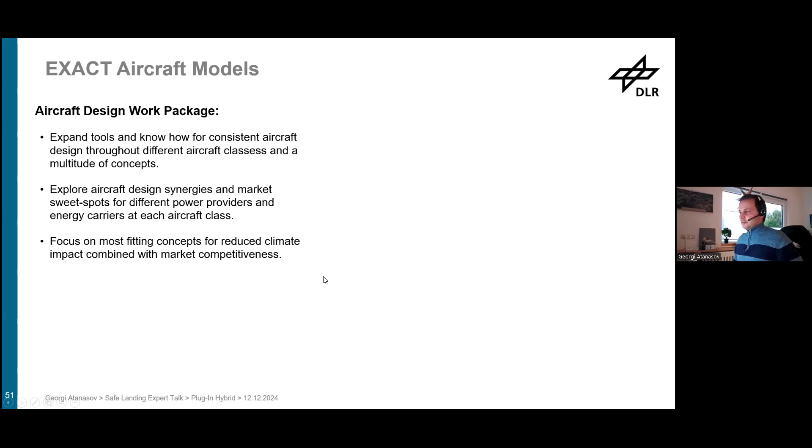So the aircraft design work package. We needed to expand the tools and know-how to make consistent aircraft design throughout the different classes and different concepts, which was a big challenge. We also need to explore synergies between the different propulsion types and aircraft configurations, and the whole goal was to allocate the most efficient concepts.

We concentrated on just the two smaller classes: the short medium range class with over 200-seater designs, and a regional class to explore solutions like the fuel cell or the battery there. Initially, the plug-in hybrid was allocated only for the regional class as an option, but then afterwards it turned out that it's actually fitting the larger class as well. So the final models also include the plug-in hybrid in the larger class.

So we have the reference aircraft, basically used to validate the models and calibrate those. We have the baseline aircraft, a conventional aircraft with conventional technology, just evolutionary advancements for 2040. We have hydrogen concepts, and we had also the electric and hybrid electric concepts. The focus here on this presentation is on the plug-in hybrid. I'm not showing everything because it's quite a lot, but these results are of interest for this presentation currently.

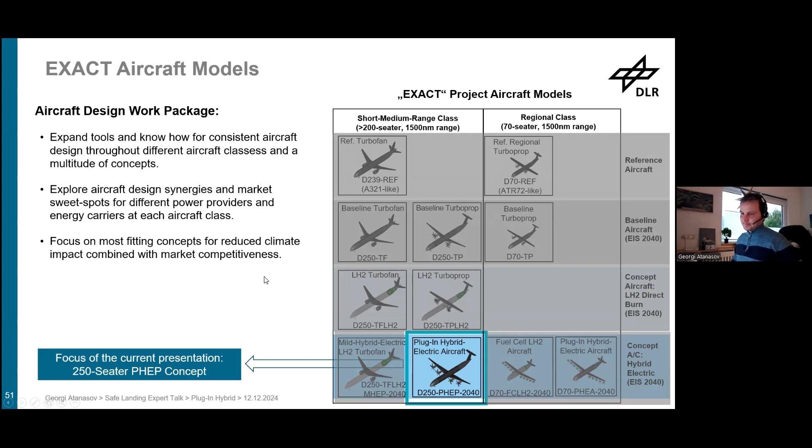So the study went as follows. We have a reference aircraft with the top level aircraft requirements. This aircraft needs to be able to fly 2,500 nautical miles. This is basically an A321neo interpretation, so it's a short medium range design range. Then we have the PAX number, the highest density, 239, then the maximum payload and so on.

Takeoff field length is also a TLAR that each aircraft model needs to be able to meet, and we used that in our designs. So the TLARs for our designs were based on these with some changes. One shift was a range of 1,500 nautical miles. At the beginning of the project, we wanted to give hydrogen technology more of a chance, so we looked into shorter range cases where the hydrogen tanks are not as large.

Then we also have accordingly more aggressive takeoff field length, typically 2,200 meters. For the project we used 1,900 meters, so more engine installed power needed because we also tend to serve more dense networks and shorter routes. So these two are connected. Then we have the 250 passenger cabin, basically a little stretch of the reference, and approach speed similar to this one but slightly higher.

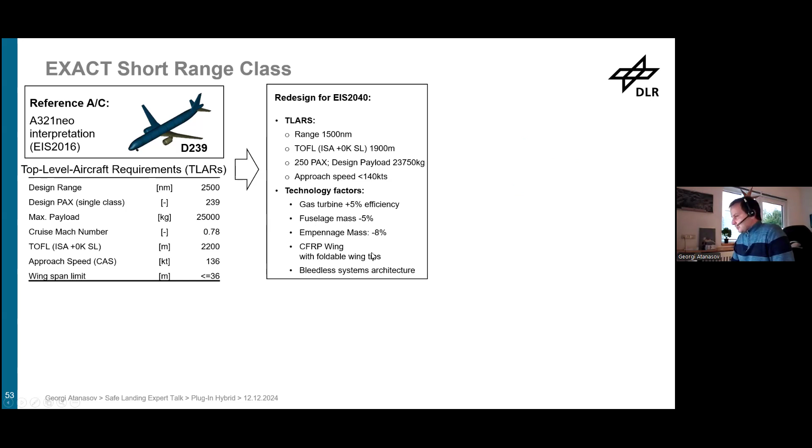Then we have some technology factors: better gas turbines, lighter fuselage, empennage, everything accounting for evolutionary advancements to 2040. CFRP wing with foldable wingtips, for example, was also a technobrick, and bleedless system architecture. From these redesign or boundary condition changes, we produced a turbofan model, the exact turbofan baseline, and the exact turboprop baseline, which is a slower version. So the Mach number TLAR was changed and optimized, and we got 0.67, which I presented last time.

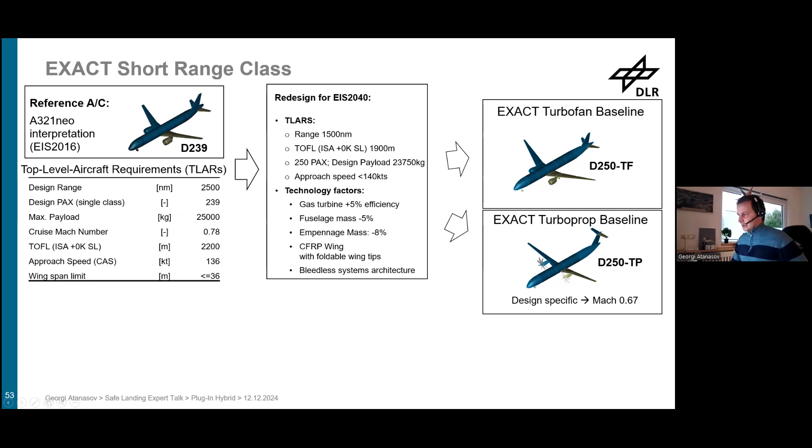And from this model, the plug-in hybrid model was derived. It has the same speed as the turboprop, and battery size is optimized for cost based on the cost models that we used in exact, in the short range. And we have a fully electric flight cabin, but I already mentioned this.

So this is basically the logical modeling path: create models that can calculate these two based on calibration on this model with some boundary condition changes, and then this one is derived in the same manner as these two. So all three concepts were modeled consistently with respect to each other, with aerodynamic models, structures models, engines, and so on. All of them were optimized for global fleet operation costs, and all were compared with the same set of boundary conditions within the project. So we used the same framework to compare the three concepts, and this approach ensured consistency and comparability between the models.

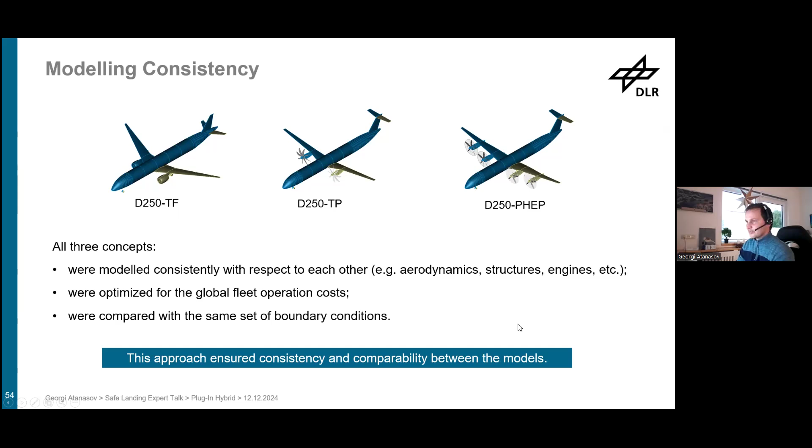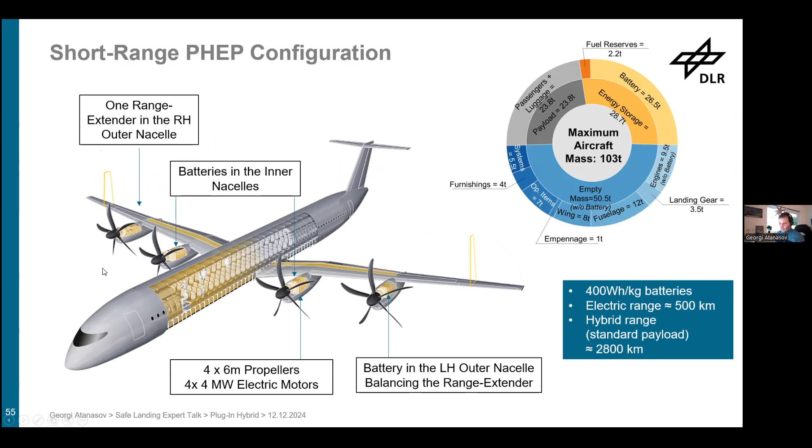So this is the plug-in hybrid model of 250 seats. We have four engines, so again distributed propulsion, but in this case four engines was the optimal solution. This is also a big discussion, so I won't start it, but this is optimized—we didn't go into more engines because this was the optimal solution for this aircraft, at least at the level and boundary conditions that we had in exact 1. We're looking into it again now in exact 2.

But now we have 4 6-meter propellers, each driven by about a 4 megawatt electric motor. The batteries are integrated in the nacelles, and we have a range extender on the outer nacelle.

And this is the mass breakdown. You can take a closer look at it later. You can see the battery mass ratio of the total mass is basically 25%. It's optimized for this model. We have an electric range of about 500 kilometers and a hybrid range of about 2,800 kilometers with a standard payload.

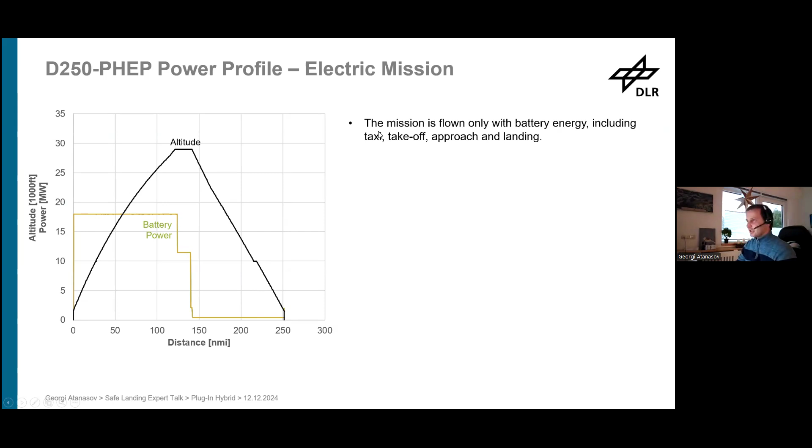This is an electric mission of the aircraft. You can see the range capability is about 250 to 260 nautical miles, about 500 kilometers. So you have just climb and then straight away descent. This is a typical, very short range, short haul mission of this aircraft.

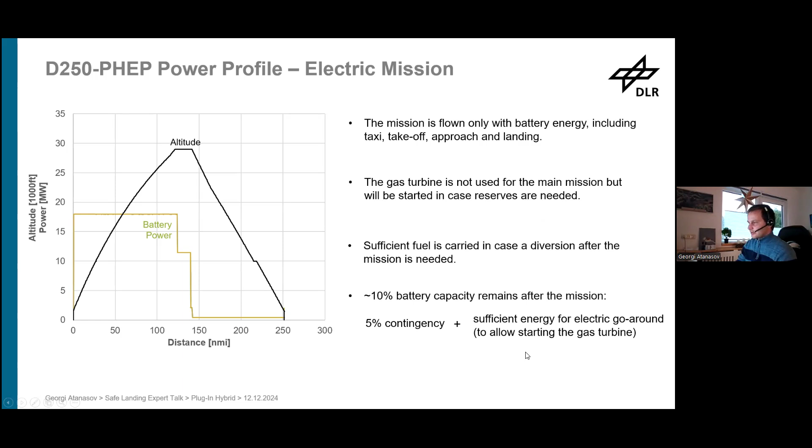In this mission, everything is done with the battery. The gas turbine is not used for the main mission, but will be started in case reserves are needed, in case the aircraft needs to divert. Sufficient fuel is carried in case of a diversion after the mission is needed. And 10% battery capacity remains after the mission, plus 5% contingency, plus sufficient energy for electric go-around.

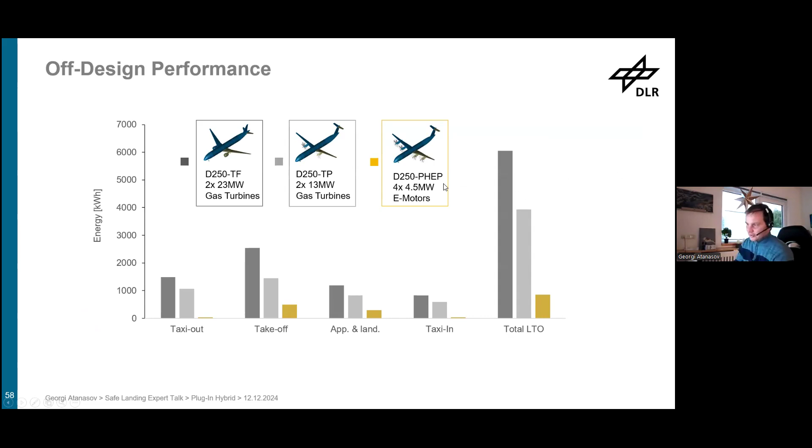One aspect, I'm out of time so I'll skip that mostly, but just taxi out, takeoff, approach, landing, taxi, and total, all of this off-design operation around the airport - the batteries are much more efficient than gas turbines. So this is another advantage of the concept.

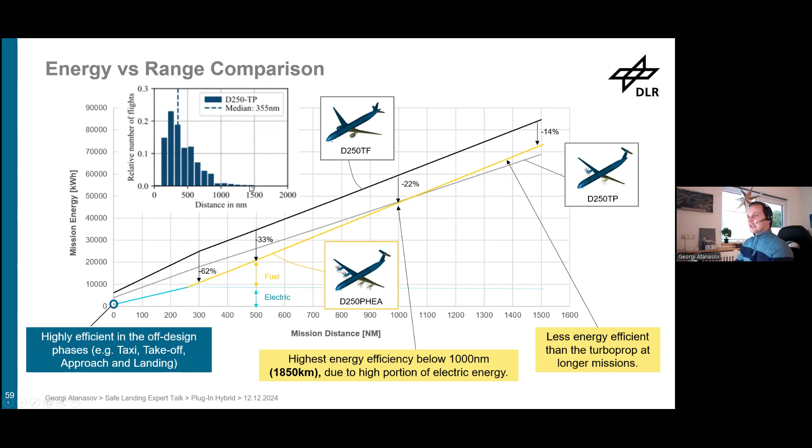And if we have a network like that, where most of the routes are under 1000 nautical miles, then it can be a really efficient solution and can decrease the whole energy consumption of the fleet quite significantly.

And it is significantly more efficient than turboprop as well. So that's it - this was, in EXACT, by far the most energy efficient concept, also with the highest potential for climate impact reduction, only matched by hydrogen aircraft. And the concept with the highest potential for operating cost reduction, especially when expensive sustainable fuels are used, because you reduce the fuel consumption of the fleet quite a lot.

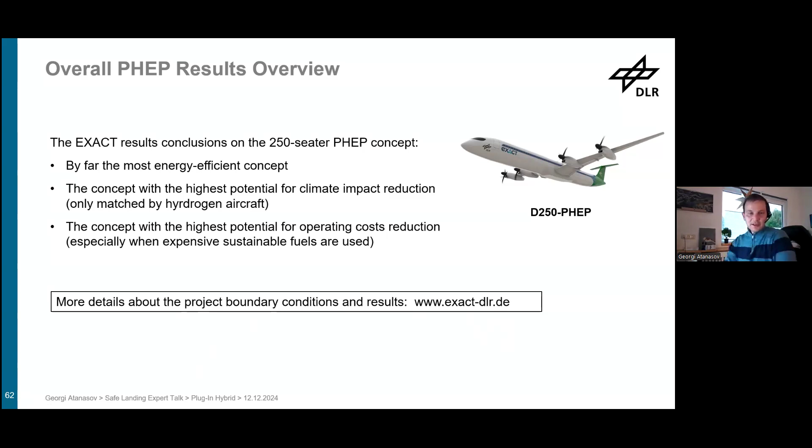If you want to know more details on the boundary conditions and the whole quantitative results on climate impact and costs, you can visit the DLR EXACT website and look there for some publications and so on. Or if not, you can contact me as well at this email.